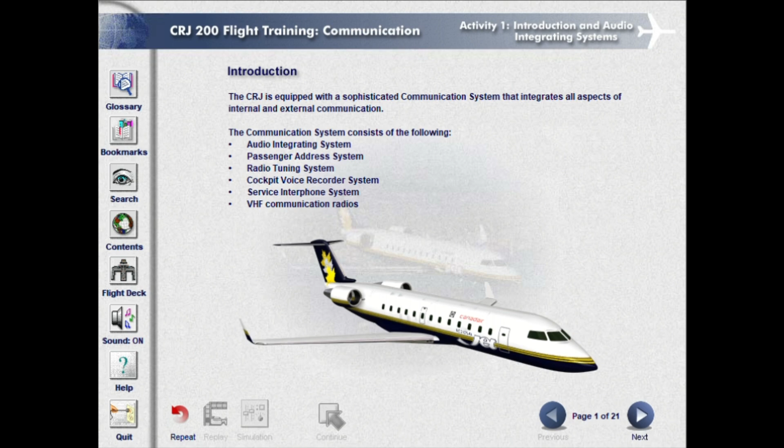Audio integrating system description. The audio integrating system provides the interface between crew microphones, speakers, headphones, and aircraft radio warning and recording systems. The audio integrating system receives inputs from various radio sources and from internally generated audio. The system then provides audio output to the flight crew speakers, headsets, PA system, communication radios, and cockpit voice recorder.

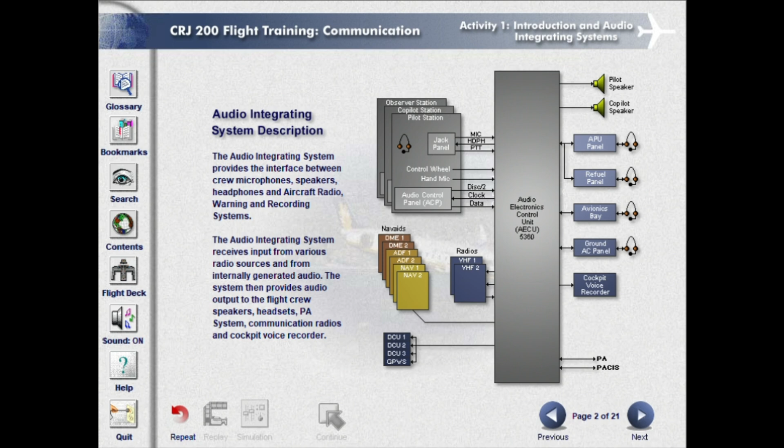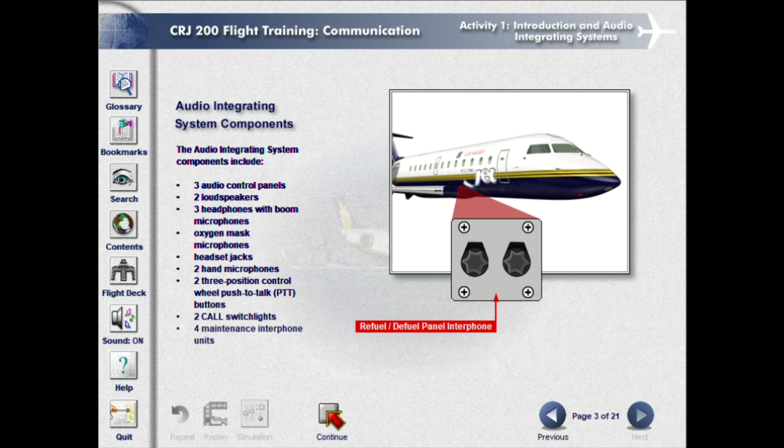Audio integrating system components. The audio integrating system components include 3 audio control panels, 2 loudspeakers, 3 headphones with boom microphones, oxygen mask microphones, headset jacks, 2 hand microphones, 2 3-position control wheel push-to-talk buttons, 2 call switch lights, 4 maintenance interphone units, flight attendant's handset.

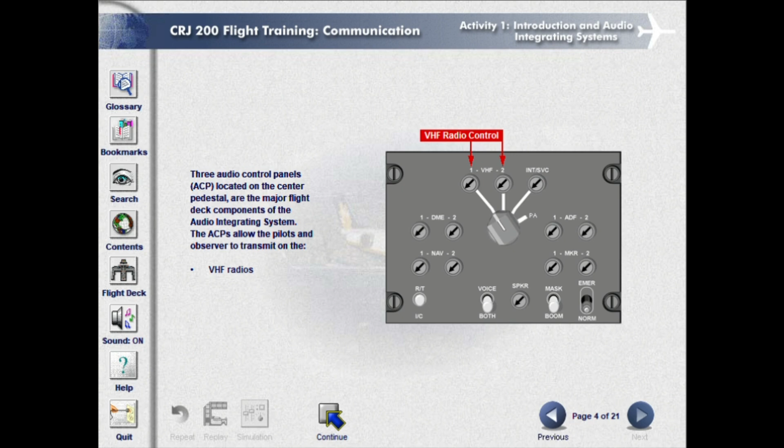3 audio control panels, or ACP, located on the center pedestal are the major flight deck components of the audio integrating system. The ACPs allow the pilots and observer to transmit on the VHF radios, intercom, PA system. Controls that allow monitoring and volume adjustment for the intercom and each radio are provided on each ACP. The audio output from each audio control panel is directed to the associated headset jacks and speaker.

The 3 audio control panels are interchangeable and provide identical services. The aural warning volume is not adjustable. Audio signals from the aural warning system, the chimes, and the GPWS do not go through the volume control switches.

Receive switches. Receive switches can be pressed in to monitor the respective communication or navigation radio. The switches are internally illuminated when pressed in. The volume of each communication or navigation radio is increased by turning the associated receive switch clockwise. Any number of audio sources can be monitored at the same time. To deselect the audio output, press the associated receive switch for the selected radio.

Transmit switch. Internal and external transmissions are controlled by the transmit switch. When selected to a position, the transmit switch connects the microphone output to the selected communication radio, internal service intercom, or PA system. The transmit switch provides an auto-listen feature. This feature allows the pilot to monitor the selected audio source without having to select the associated receive switch.

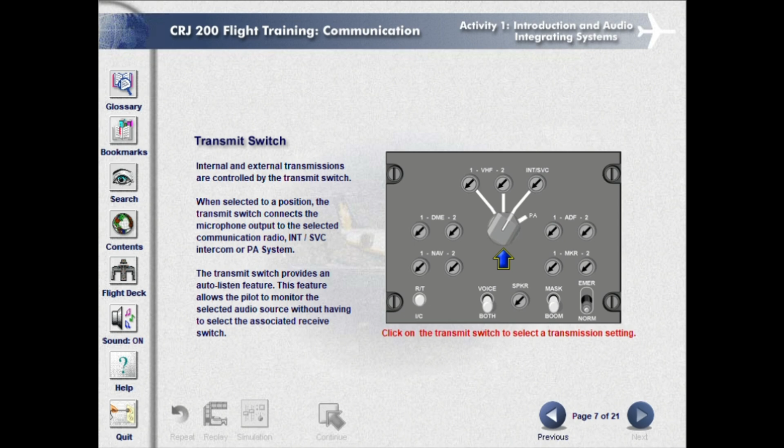RT-IC switch. The radio transmit intercom switch is a 3-position switch that is used to transmit on the radios or intercom. When held in the RT position, it acts as a push-to-talk switch for the headset boom microphone or the oxygen mask microphone. When released, the switch is spring-loaded back to the center off position.

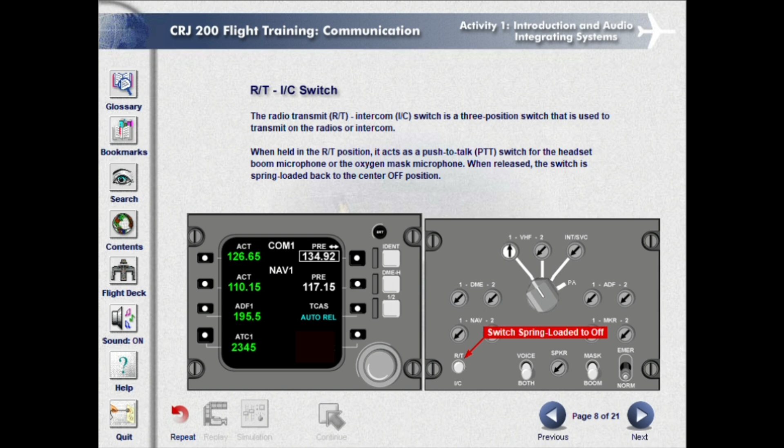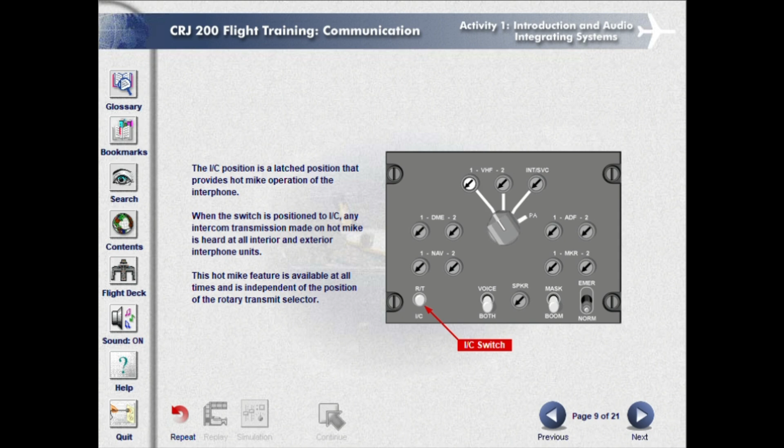The IC position is a latched position that provides hot mic operation of the interphone. When the switch is positioned to IC, any intercom transmission made on hot mic is heard at all interior and exterior interphone units. This hot mic feature is available at all times and is independent of the position of the rotary transmit selector.

Voice/both switch. The voice/both switch allows the pilot to separate the audio when monitoring the simulcast audio of a radio transmission. When both is selected, the station Morse code identifier and the voice message are audible. When the switch is selected to voice, the VOR, ILS, or ADF station Morse code identifier is filtered out, allowing only the voice signal to be audible.

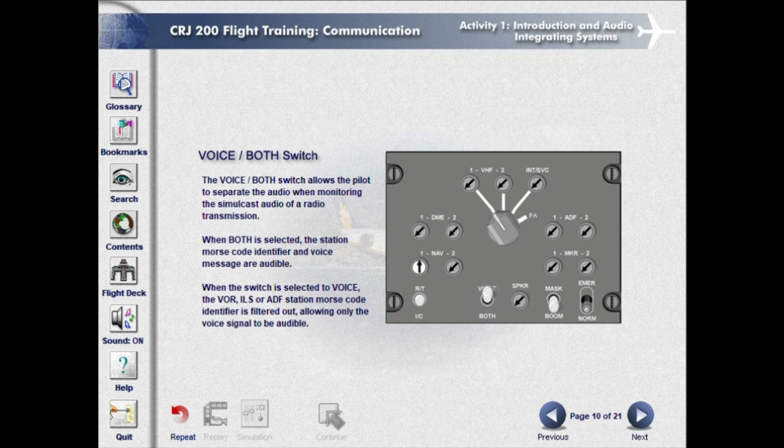Flight compartment speaker switch. The flight compartment speaker switch controls the audio output of the associated overhead speaker. There are two speakers on the flight deck. The pilot's audio control panel speaker switch controls the output for the pilot's overhead speaker. The co-pilot's audio control panel speaker switch controls the co-pilot's overhead speaker.

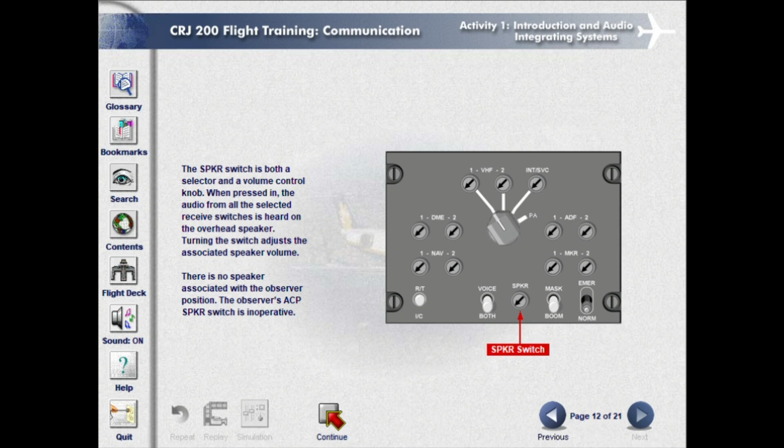The speaker switch is both a selector and a volume control knob. When pressed in, the audio from all the selected receive switches is heard on the overhead speaker. Turning the switch adjusts the associated speaker volume. There is no speaker associated with the observer position. The observer's ACP speaker switch is inoperative.

Mask/boom switch. The mask/boom switch on the ACP controls the oxygen mask's microphone. Normally, the switch is left at boom, which activates the boom mic on the associated headset and deactivates the mask microphone. When the oxygen mask is used, the switch must be selected to mask to activate the internal mask microphone. When mask is selected, the boom microphone is deactivated.

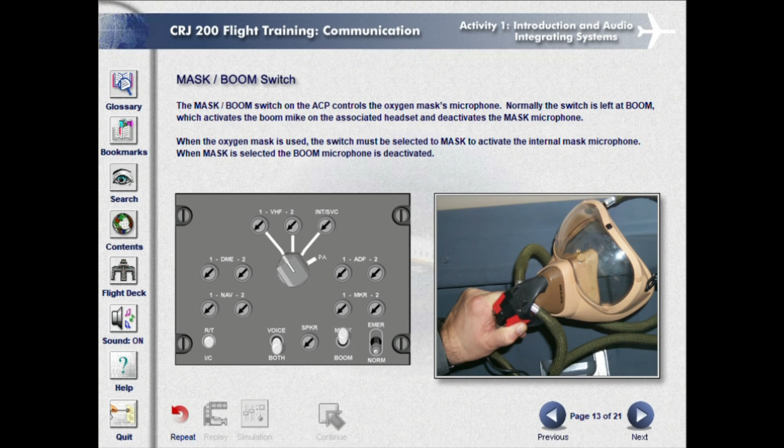Emergency/normal switch. The emergency/normal switch is a two-position latching switch that is usually set to the normal position. The emergency position is used only when a failure of the audio integrating system occurs. When the emergency/normal switch on the pilot's audio control panel is set to the emergency position, the electronic circuits of the audio integrating system are bypassed. The pilot's headset is connected directly to NAV1, VHF1, and the aural warning system.

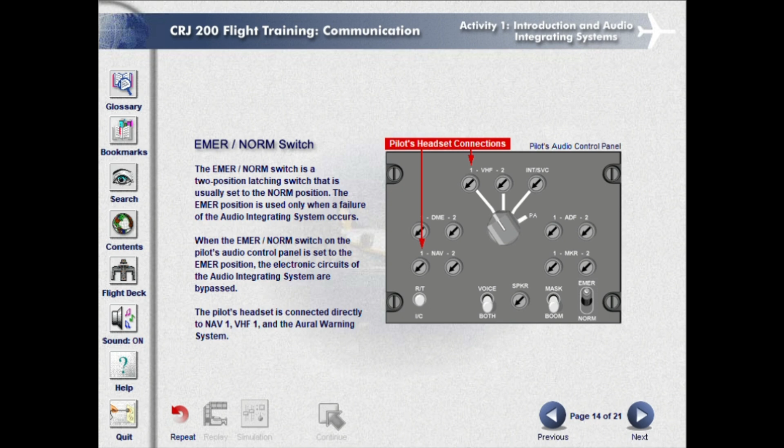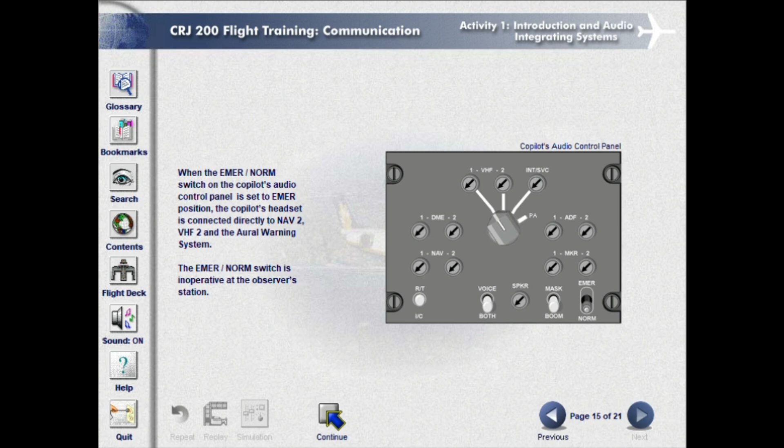When the emergency/normal switch on the co-pilot's audio control panel is set to emergency position, the co-pilot's headset is connected directly to NAV2, VHF2, and the aural warning system. The emergency/normal switch is inoperative at the observer station.

Pilot's and co-pilot's control wheel RT/IC switches. The pilot's and co-pilot's control wheels are equipped with radio transmit intercom, or RT/IC, switches. The function and operation of the control wheel switch is similar to the RT/IC switch on the audio control panel. When held in the RT position, the switch activates the boom or mask microphone. When the RT switch is released, it is spring-loaded back to the center off position.

IC is a latched position. IC provides hot mic operation of the intercom system. The observer has a similar push-to-talk switch. It is located near the forward wardrobe unit.

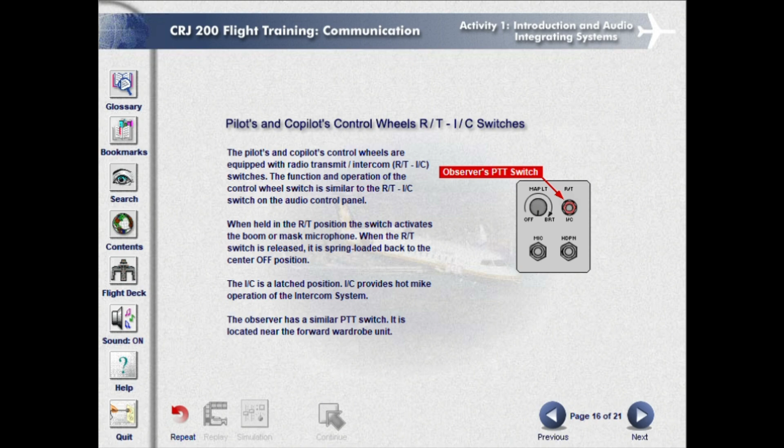Hand microphones and headset jack plugs. Hand microphones are mounted on the control column at each of the pilot stations. Jack panels are available at the 3 flight deck positions to connect the headsets to the audio integrating system.